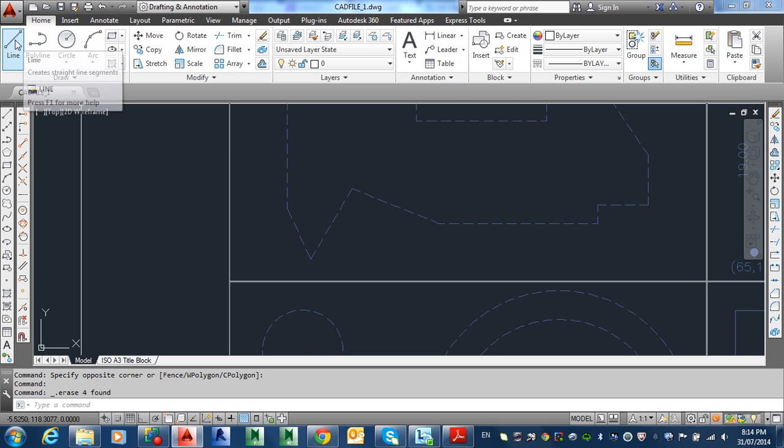Okay, so basically we're on page 24. I'm not going to follow this strictly. I'm just going to show you quickly what the intent of it is. Basically it says click on the line command, zoom in here, and see how close you can get there and how accurate you can get to this without any object snaps.

So apart from the fact that I'm wasting a bit of time zooming in and out just to make sure I get it accurate, at the end of the day it won't be accurate anyway, and I haven't got the patience to go through and do the whole shape like this because we'll be here all night and the recording is going to run out of time.

So if I zoom in, well, I'm going to do one more of these things here. By the way, it does say to have ortho on initially as well, because it does help with making sure things go straight at least enough like this.

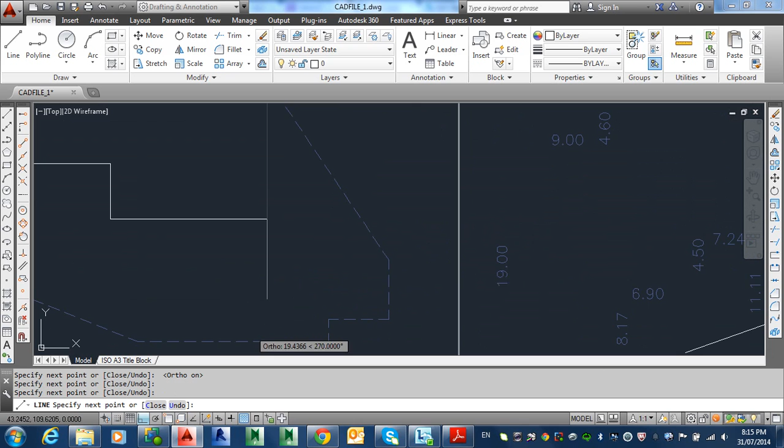And if I go here, for example, and I go there, I can't do the next one unless I take ortho off, F8 we said. Now I can rubber band around and go in here. Look at that. And I'm not zooming in a lot now because I'm running out of patience.

But at the end of it, if you've gone all the way around, you can press C for close, or you can click on the C on the close here, and it will go to the beginning point if you have not stopped, if you have not made a mistake.

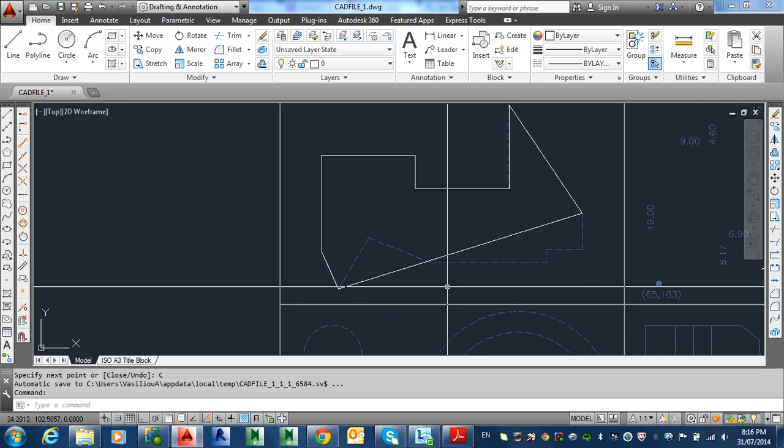If you have made a mistake, for example, now if I undo now that I finished the command - and how do I know if the command's finished? Well, it says here type the command. So it means the command's finished.

But if I undo now, which is Control Z, or this undo up the top here, or U enter, it will undo everything that I've just done. Before I do that though, let me just zoom in and show you how accurate I was with my efforts.

Pretty good really. It's a bit off there if I zoom again, because it can only go so far in before it stops. It can't go any further. And that you might have to employ this guy here to get past that.

If you go to zoom in or zoom window, it would help, and just zoom in there. See, and now I can go a bit more in. See how far out I was.

All right, even though I try, now it won't go further out now. So if I use the middle mouse button, double click, it will come out.

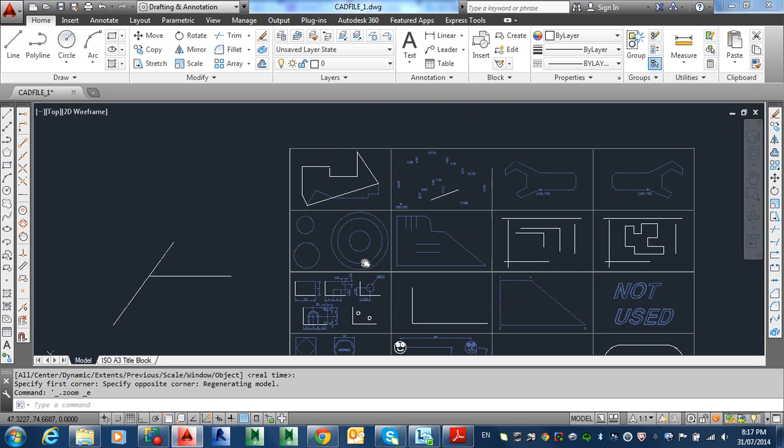Alright, anyway, I can't undo now because I have to undo all these other steps. So I'll just erase this. All I'll do is just put a window over here, like that, and get the whole lot and press delete. It doesn't delete the blue lines because they're actually on a locked layer, so it doesn't delete those.

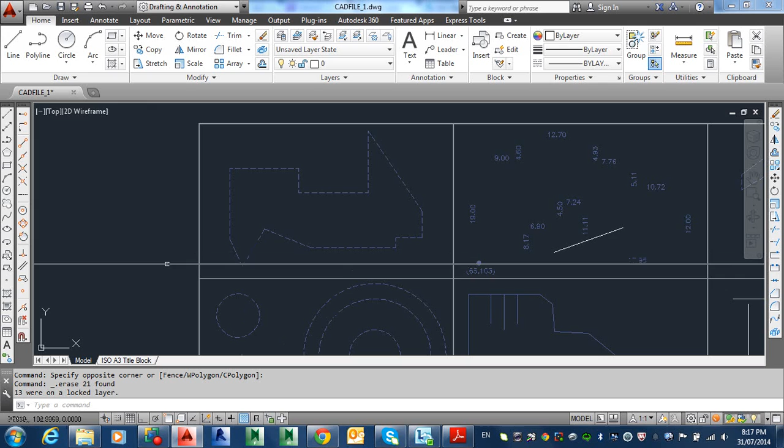Okay, so that's fine. Alright, so the next thing it's going to ask you to do is, this time, use the line command, but come over here every time and pick one of these.

Now, I don't have to zoom in because I know I can go there and it says endpoint. And I know when it says endpoint, it'll be accurate. So back here again, get another one, back here again, back and forth, like that, and keep going like that.

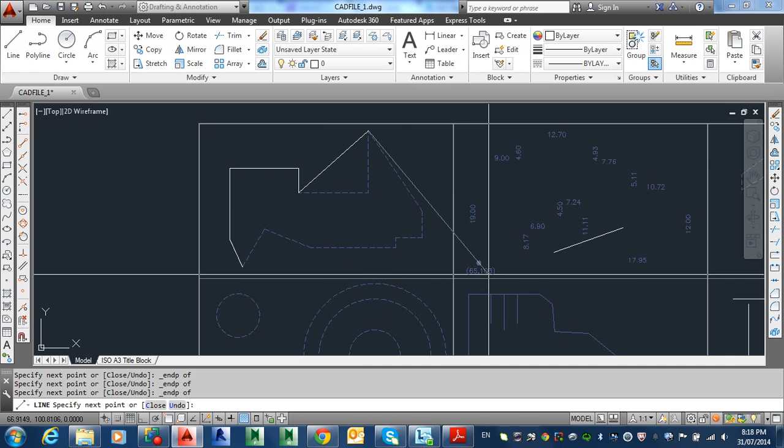Now, what happens if you made a mistake in your hurry to get this thing done, and you just press something else, say that, okay? Well, what you can do is go U, enter, or you can click on the undo here, and it will just undo one step at a time back, and you can just correct it.

If I made a mistake like that, and I thought, oh no, escape, enter, whatever, panic, I do U, enter now, or undo here, undoes the whole thing. So a lot of the commands have an internal undo that undoes one step back. Like trimming, if you're trimming a whole lot of lines to a particular position, one at a time, you can undo one at a time as well. Go back if you trim the wrong one.

So you look out for these commands here. If I just do a couple of lines, look out for this thing down the bottom here, which says U for undo. You can use that when it's there. So now the next thing it's going to say after you erase it for the second time, do it for the third time.

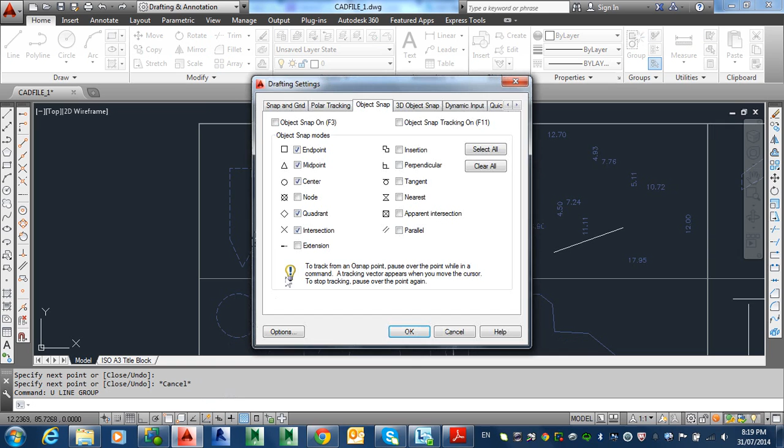Except this time, right-click here where the object snap is. Right-click, do the settings. My settings have got a whole lot of stuff in there, but all it says is just put the endpoint on. So maybe I'll take these off for now. Put the endpoint on only and go OK. Make sure the object snap is on.

If you forget to put it on, like I just did intentionally, you can press F3 or click it on afterwards, same thing. Now that object snap endpoint is there, active all the time, it means we don't have to keep going back here all the time to pick it up.

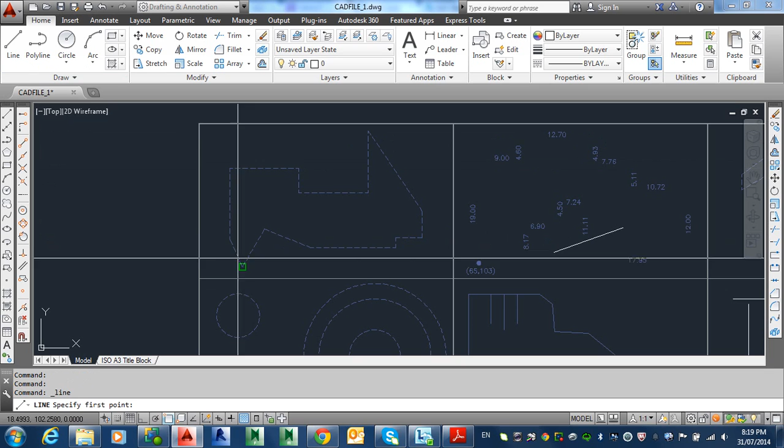So we can go line and just come down here and there, and we have to be just close enough, it's good enough, like about there. It finds it as long as you've gone past the halfway mark. I can click here and you go to the end. So it's so much quicker and it's dead accurate.

There, there, there, there. I can do this quite quickly now. And the last one, I can just go to the end of that, or C enter for close, or just click on close down the bottom here, and that's done. That's finished. There's another line from before, I can delete that there.

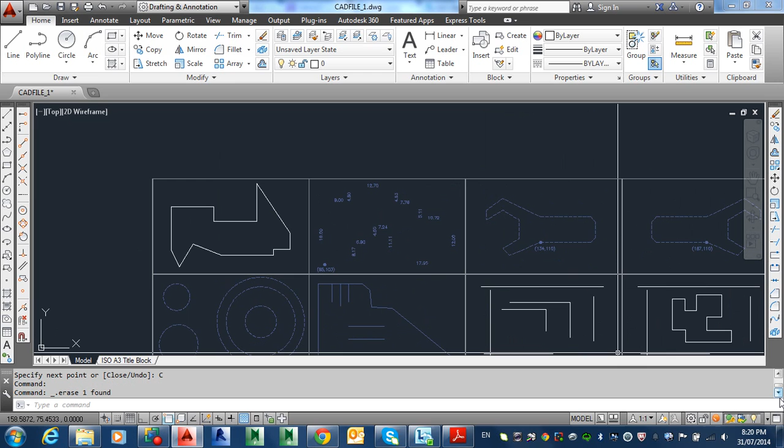The next one, and I'll just keep an eye on the time. I think we're running out of time. We've got 6 minutes or so. So let's do the next lot.

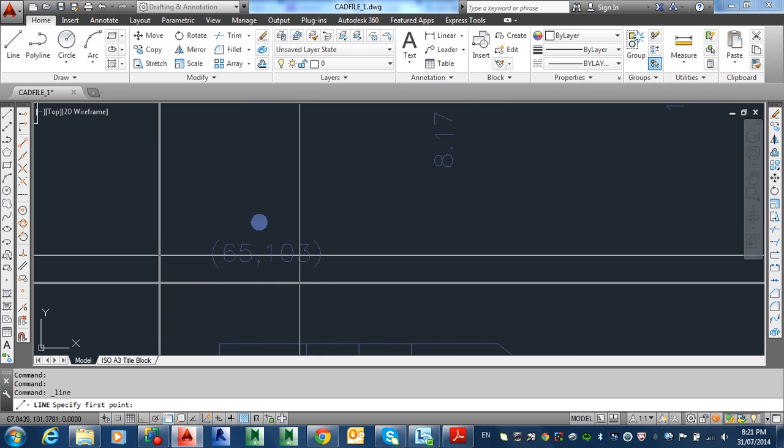Now this one here, what he wants you to do is go to the line command, and it wants you to just type in these numbers. You don't put the brackets in. Basically it's a known location that's been given to you, and every location in AutoCAD has its own coordinate, and that's all measured back from 0,0, which is basically the bottom left-hand corner here. So from the bottom left-hand corner, this point here is at location 65 along the X, which is the horizontal, and 103 along the Y.

So if I go line and don't click, and you go 65, 103, and you press enter, it'll go there. Now it does require that you have ortho on, and you can turn on ortho anytime, either before the command or in the middle of the command. F8 comes on.

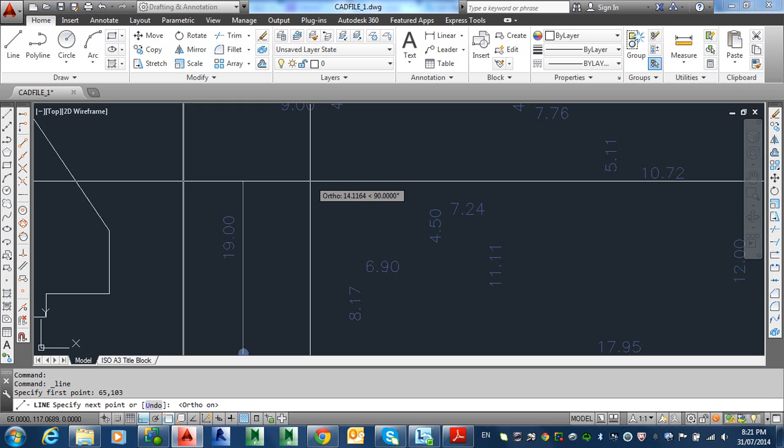And all you have to do is just read the numbers here and just do what it says. So you point upwards and you type in 19. You don't have to put in the 0.00, all right. Like here, it's 9, 9, enter. I'm pointing the right way. This one is 4.6, cross, 12.7.

As I said, if you make a mistake, you can just do U, enter. This one is 4.93. So if I go up, this one is 7.76. So if I went 8 accidentally, well, I can do U, enter, and come back to the beginning there, and I'll just type in 7.76 this time. So just go around like that.

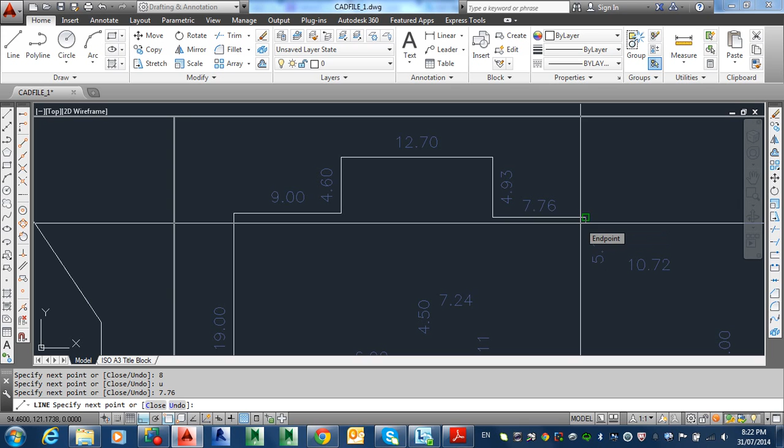I'll leave that there, I'll just escape out of that.

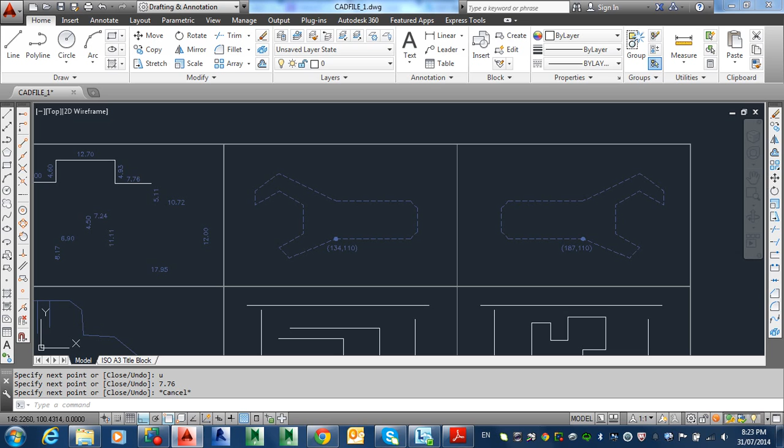The next one is a fair way in, we probably covered a few pages. The one I just did was on page 31. Then it talks a bit about page 33. I suggest you do this, 33 and 35, and then on page 36 it starts this spanner here. It's best that we do the other bits first, before we do the spanner, so we can understand the coordinate system. So I won't rush that, I'll let you play with the other two first, and we'll do that another time.